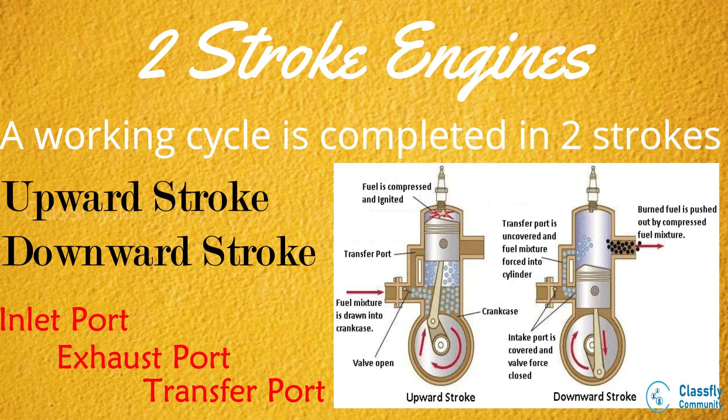Now, let us study the principle and working of a two-stroke petrol engine. Well, this engine works on the Otto cycle, that is, the combustion of fuel takes place at constant volume. First, the downward stroke.

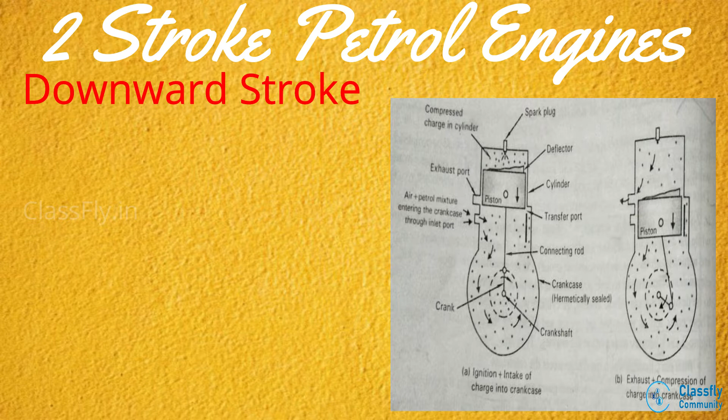Now, let us say that the piston is currently at the top dead center. From the figure, we can say that the air and petrol mixture which has entered the cylinder in the previous cycle is compressed to a high pressure and temperature. In the meantime, the inlet port is also opened. As a result, fresh charge of air and petrol mixture will enter the crankcase. The exhaust port and transfer port now remain closed.

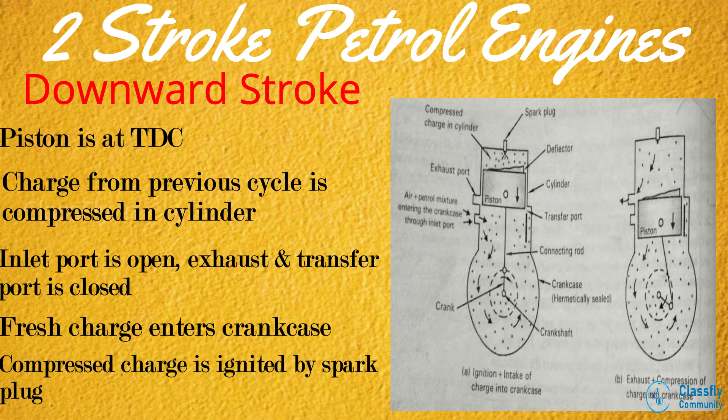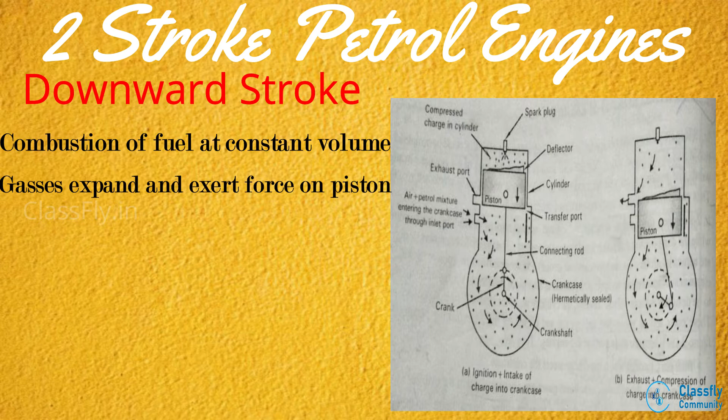Now, the compressed charge which is present in the cylinder from the previous cycle is ignited by means of the spark generated by a spark plug. The combustion of fuel will take place. This combustion will lead to the expansion of the burnt gases, and this expansion will exert a large force on the piston, causing it to move rapidly from the TDC to the BDC.

This force will then be transmitted to the crankshaft through the connecting rod. As a result, the crankshaft will rotate at high speeds. This is then transmitted to the flywheel and gears and other transmission elements, and finally it is used to turn the wheels of the vehicle.

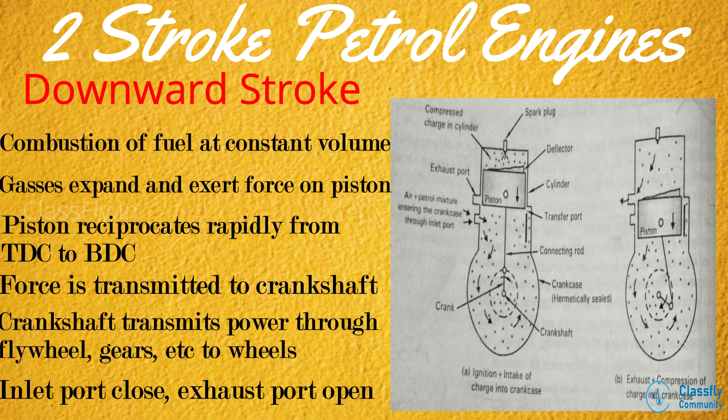Meanwhile, when the piston is being pushed down by the expanding gases, the exhaust port will be uncovered. Hence, a part of the burnt gases, due to their own expansion, will escape through this exhaust port. As the cycle continues, the further downward movement of the piston will lead to the opening of the transfer port.

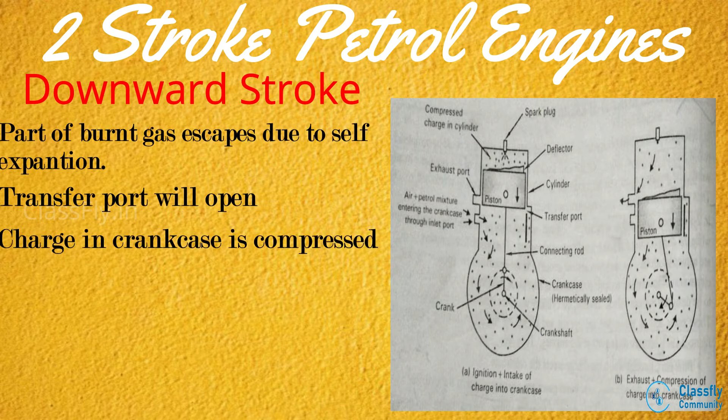Here, we can also note that the further downward movement of the piston will compress the air-petrol mixture that is present in the crankcase. Thus, the pressure exerted will cause the charge from the crankcase to rush into the cylinder head through the transfer port. Meanwhile, the fresh charge entering the cylinder will drive away the remaining burnt gases through the exhaust port. In this manner, the exhaustion of the burnt gases will take place while the power stroke is still in progress.

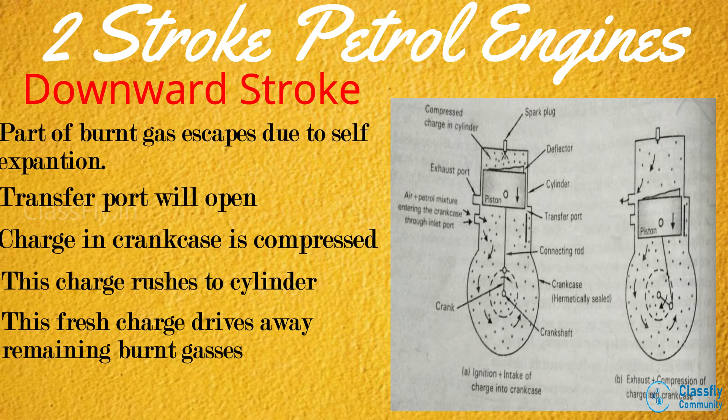When the piston reaches the BDC, this downward stroke is completed. Hence, the crankshaft will complete half of a revolution. Now, the upward stroke. During this stroke, the piston will now move from BDC to TDC.

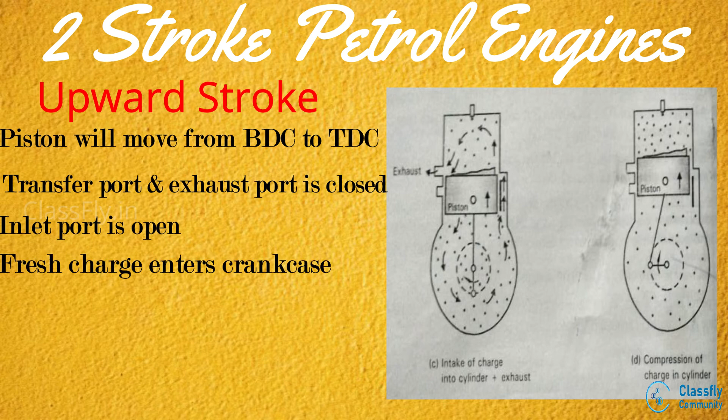As this happens, it covers the transfer port, thereby stopping the flow of fresh charge from the crankcase into the cylinder. Further upward movement of the piston will also cover the exhaust port. Now, the inlet port will open and the upward moving piston will create a partial vacuum in the crankcase. Hence, fresh charge of fuel and air mixture is drawn inside the crankcase through the inlet port.

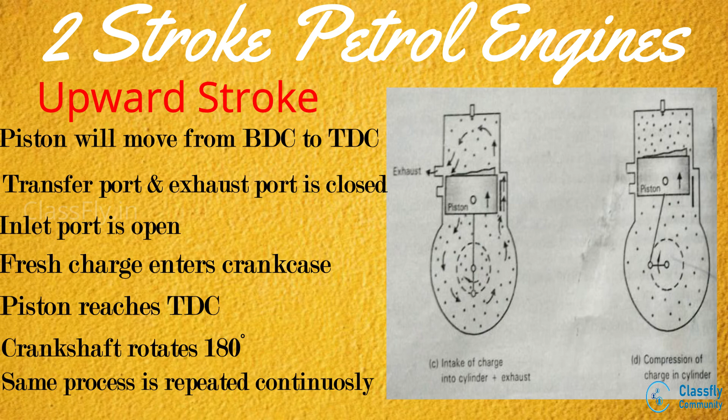Thus, we can see that the intake of the fresh charge takes place while the compression stroke is still in progress. When the piston finally reaches the top dead center, the upward stroke is completed. In this stroke, the crankshaft completes one more half revolution, and hence it will complete a total of one revolution in the cycle. This process is continued again and again for the production of continuous power.

Well, the two-stroke petrol engines are used for light-duty vehicles such as mopeds, scooters and motorcycles.